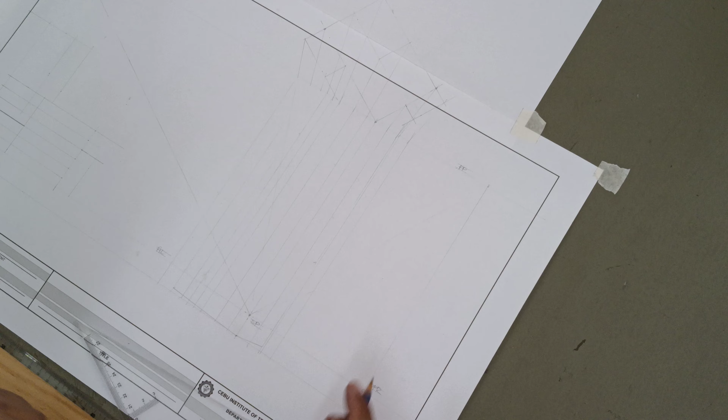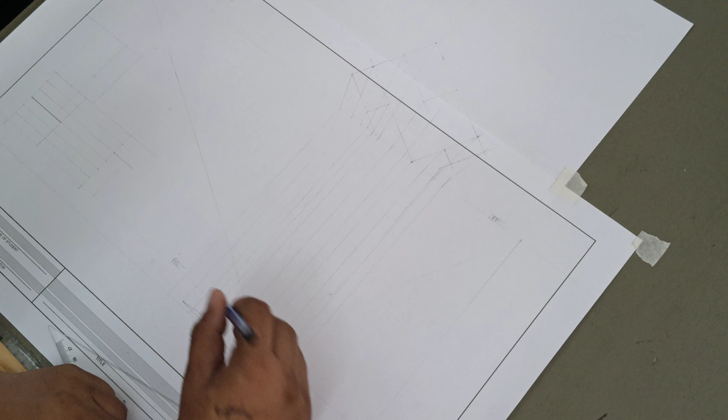Next is this one, the last corner. Kani mo checking point. Mag-meet di siya at intersection exactly, then your projection is correct. Okay, let's find out. Here, so let's do the first stroke. Bata na siya murag ko na siya variances o sa ginagmay, then that's acceptable. So, when you draw this to here, mag-intersect na silang tulo ka line.

Imperfect scenario. Na may usahay nga dili kayo align imong pagka-project, mo differentiate siya, but as long as it's not extreme, then that's fine. That's okay. So let's check if accurate ba. Does it hit? Sakto? Okay, then you're doing good.

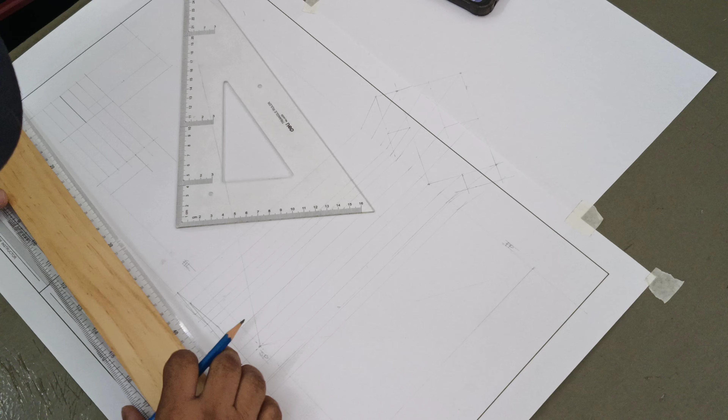And I don't allow, by the way, I don't allow color coding. So you should exercise the effective use of line weights. When to use pencil, of course, in graphics 1, you are trained to use pencil for construction lines and guidelines like this, and then decide later on unsa imong i-point 1, nasa tunga nga thickness o ang pinakabaga. Okay, so let's extend this one to hit this line, this projection line.

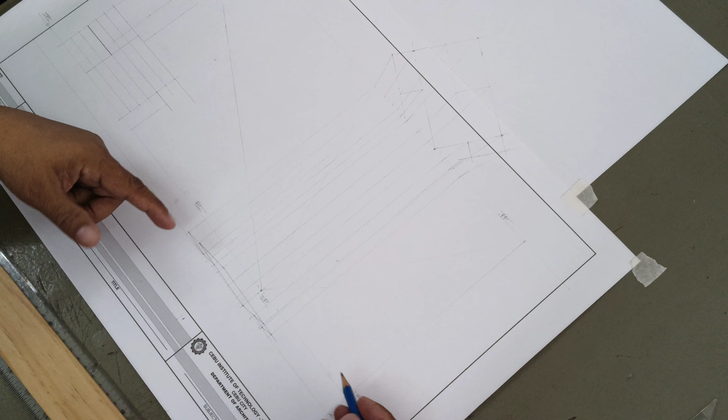Okay, so the hitting point with the section should be like this. Remember that we have already projected the other side, so they should meet using the vanishing point. So sanay ko ang tower na lang. Okay, so referring to this, let us find out the intersecting point, and then also look at that line, make sure that it will touch. Okay, so this should be your intersection point, and then when you draw this towards that line, make sure nga mag-intersect siya. Let's try to check.

Okay, so your plan is now being converted into a perspective angle. Do you follow? Imagine na lang na from top view ni siya. I think you're familiar with Google Map, di ba? I-click nimo sa street view sa Google Map, ang map mukalit din ng ana. Okay? Relate?

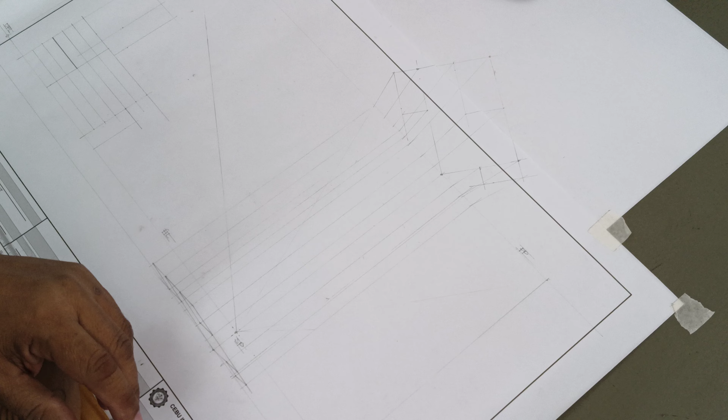So, okay, now we are ready to construct the object shape. Now, all projection should be seen, ha? Inig magkuan mo line, kinahanglan traceable siya. If it's not traceable, meaning it's erroneous. So, you'll get negative credit to that. So, now let's start with projecting heights.

Now, I would like to refresh about the word ML. Okay? The ML is the line that touches the PP and the building in the drawing setup. But later on, I will also teach you na may cases nga ang building wala mag-touch sa PP. But that's another lesson. Basta, always remember the beginning, meaning your zero measurement. The origin is this line hitting the building, the PP. So, let us label this as measuring line.

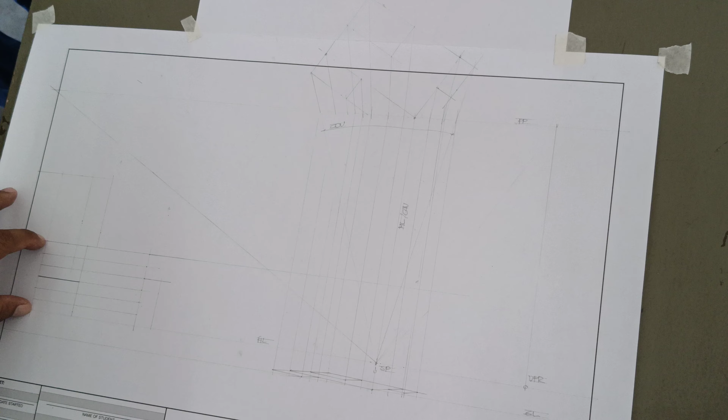Like this is, ilang ito yung height? 6, 1, 2, 3, 4, 5, 6. In project ni mo dere, if you recall your orthographic projection in graphics 1, pag imo nang i-project dere, kini nga measurement is the same as this. So, mo ni siya imong beginning. Atong pormahon imong box. Alright?

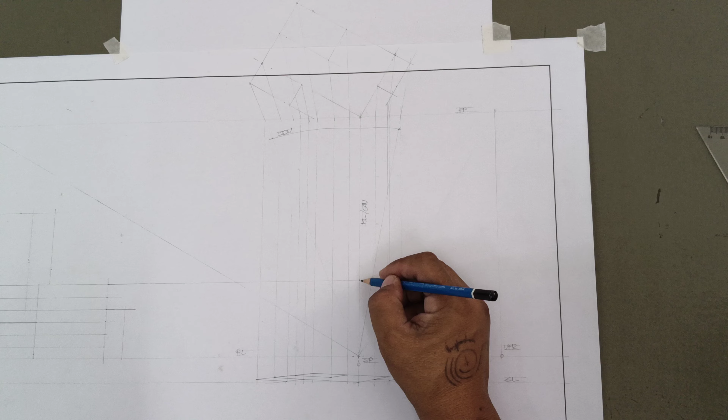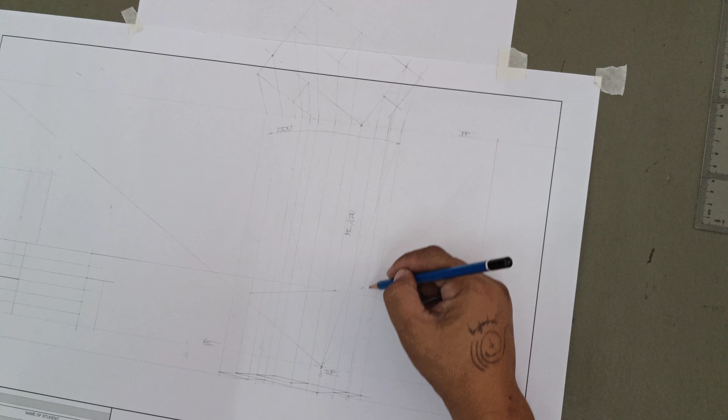Now, if this is your beginning projection, you can now construct the object using this height. So this height should terminate here. So kanina. And then on the other side, diri to this. Okay?

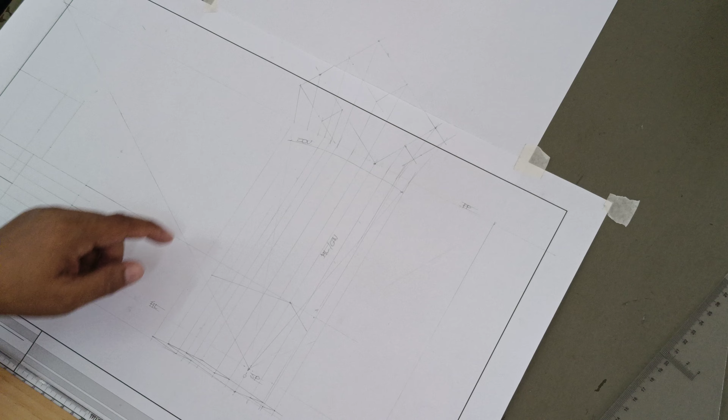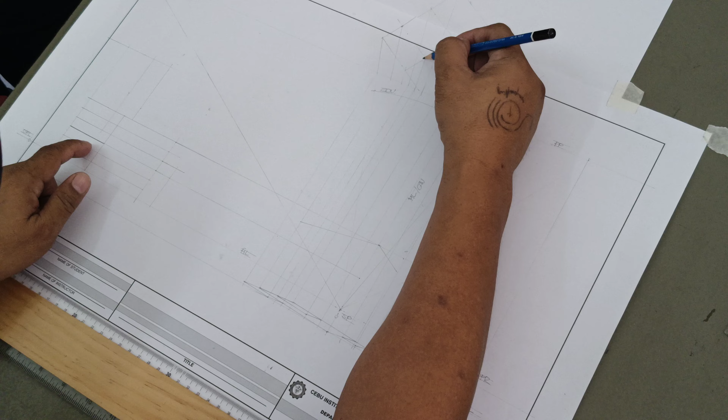Now, this is the tricky thing. When you project measurements, it should pass always here. Common mistake of students. Ilang pangitaon. Kani, and then mo na ilang height. That's wrong. All measurements should start here. So, if it starts here, you have to use the vanishing point before you can locate its actual location, which is this.

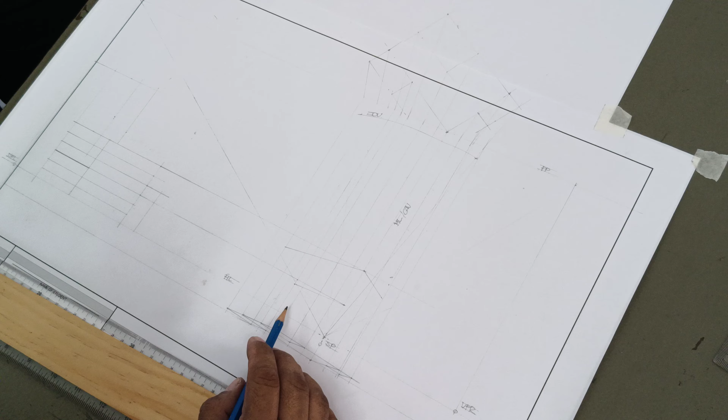Correct? Since we're talking of convergence, imo siyang ipatravel and then that one. So, naigo na nimo. Next is kani nga corner. So, using this, kani nga lines here is this vanishing, kani nga line here is this vanishing. So, using this location, you will be able to get the actual location of this, which is kulang pa. Kana. Ya follow na lang kay mo end siya diri.